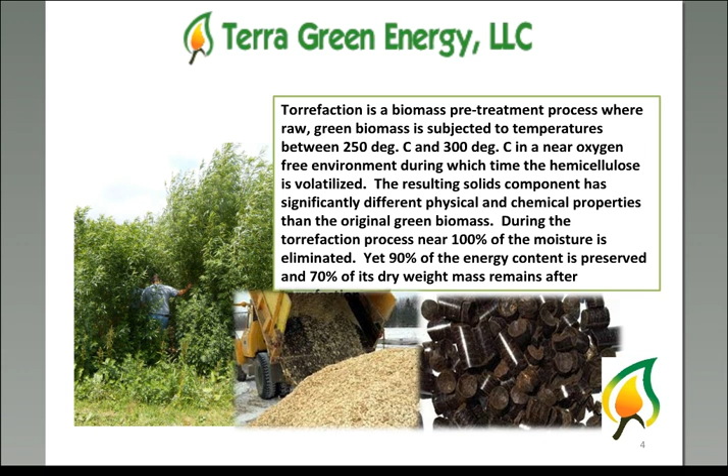I know that this table is a bit busy, but if we go through it, you can see the differences between the different forms of wood. If we look at wood chips, white wood pellets, torrefied pellets, I put a column in here for steam exploded pellets. For those of you who are not aware, a company called Zilkha has developed a pretreatment process based on steam explosion, and so I put that column in there. Charcoal and coal. I'm often asked the question, well, torrefied, that must be a lot like charcoal. Well, I think this table will explain to you where the similarities are and where the differences are.

If we look at moisture content across the board here, each one of these has slightly different moisture contents. The highest being wood chips, wood pellets 7 to 10%, torrefied pellets in the 1 to 3% range, steam exploded pellets about the same as torrefied, maybe a little bit lower, charcoal basically in the same range, and coal. Coal has a moisture content that can really vary a lot, but 10 to 15% moisture is quite common.

The heat content, the calorific value, as measured in megajoules per kilogram: wood chips are 9 to 12, wood pellets about 1.5 times that. Torrefied pellets can be twice the calorific value of wood chips, and 1.3 to 1.5 times what white wood pellets are. Steam exploded pellets, just a little bit less than that. Charcoal, of course, quite a bit higher. So this is one area where charcoal is different than torrefied, and of course coal.

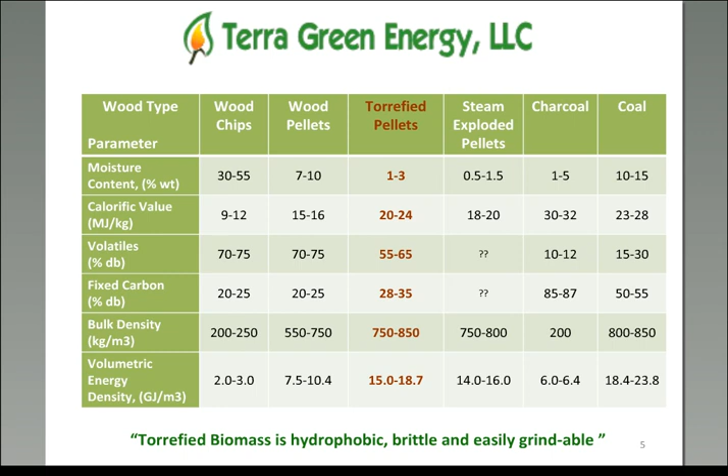And coal is, you will notice that torrefied pellets, steam exploded pellets, and coal are all relatively in the same range. The big advantage for torrefied biomass is that it's hydrophobic, it's brittle, and it's easily grindable. Those are physical characteristics that differ from either wood chips or whitewood pellets.

If we just look at the issues inhibiting the use of wood chips without any pre-treatment other than sizing: wood chips are low in density and bulky. They're wet and highly wettable. They're very expensive to grind. You have trouble feeding them because of the non-uniformity in the particle size. They have low energy content on a weight basis, low energy density on a volume basis, and they're bioreactive, meaning that they will rot. Torrefaction solves all of these issues.

It has a much higher bulk density. It's dry and hydrophobic, easily grindable. Uniformity allows ease of feeding. High energy content on a weight basis, high energy density on a volume basis, and it is not bioreactive. Torrefaction can be applied to all types of wood and grasses and other types of biomass, resulting in a uniform commodity type fuel.

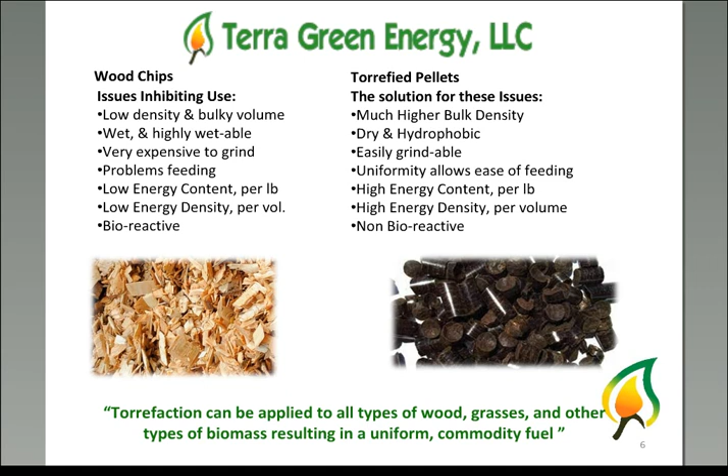Let's take just a minute and talk about what's going on in the rest of the United States with regard to torrefaction. About 6 months ago, there was a consortium formed to address in detail and in a quick time frame the issue of torrefaction. The founding members of this consortium of advanced wood to energy systems, it's called CAWES, are the United States Forest Service through their Forest Products Laboratory, the Herty Advanced Materials Development Center at Georgia Southern University, and the U.S. Endowment for Forestry and Communities.

These three groups are the founding members of CAWES, and CAWES will attempt to assess the challenges and knowledge gaps relevant to the advancement of torrefaction technology. They're going to put $4 million into this effort, and they're going to embark upon a 24-month work plan with an aim to validating torrefied wood as a promising renewable energy market solution. From their literature, you will see that torrefied wood has a significant market potential as a hydrophobic, densified energy carrier that stores, travels, and functions much like coal.

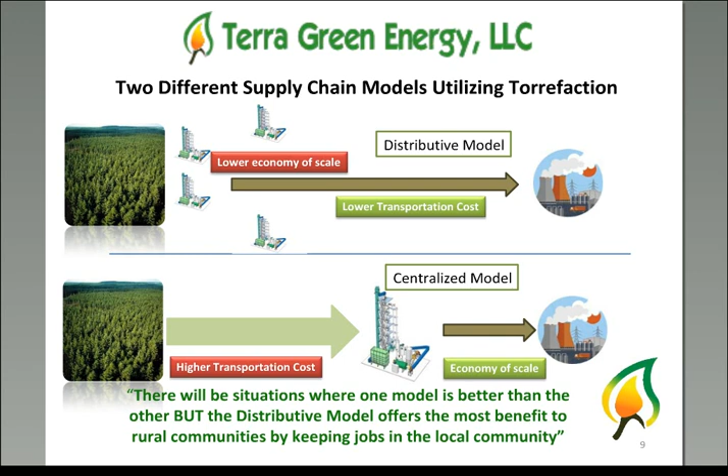The other model is the centralized model, where you remove the material from the forest and transport it as wood chips to a central, much larger torrefaction facility. Now, the disadvantage is the higher transportation costs, but you do enjoy some economies of scale because the facility is so much larger. There will be situations when one model is better than the other, but the distributive model offers the most benefit to rural communities by keeping jobs in the local community. I believe that to be the better model in the longer run.

In the fall of 2012, the managers at Terra Green Energy made the decision to build a small-scale commercial torrefaction process in Port Allegany, Pennsylvania. It's in McKean County. There were three reasons why this decision was made. First, of course, to demonstrate the technology. Second, to provide large-size samples for testing. And three, to utilize this demonstration facility as a marketing platform.

We can bring prospective customers for the technology and the product into the site, which we are happy to do, and show them a working torrefaction facility that a full commercial plant would look exactly like, and in fact, the algorithms and the computers that control it are all the same as on a full-size commercial plant. The system consists of three thermally integrated subsystems: a rotary drum dryer, a combustion unit, and our own proprietary reactor. The system includes all the necessary material conveyance systems: hot gas, ductwork, dampers, airlocks, fans, and a complete instrumentation package to measure and manage the process.

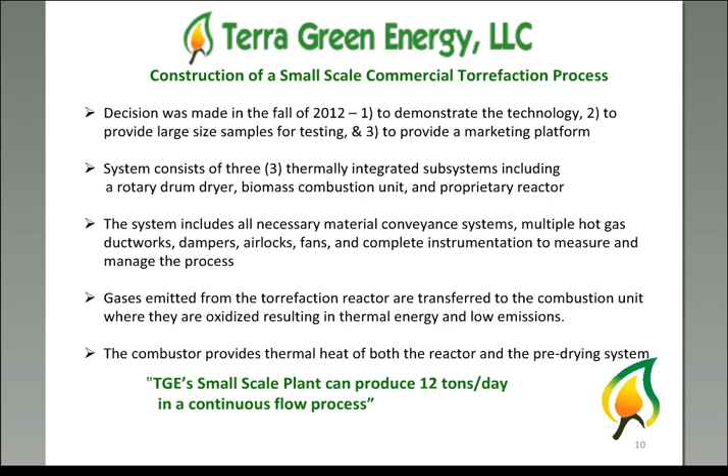So it goes into the rotary drum dryer. It is dried to about 12 to 15% moisture. It goes into the top of our torrefaction reactor. It travels down through the torrefaction reactor. We have the ability to control the residence time in the reactor from as little as 12 minutes to as much as 45 minutes if we so desire. The material goes down through the torrefaction reactor, exits the bottom, goes through a quench unit and a screw conveyor cooler, and exits toward densification.

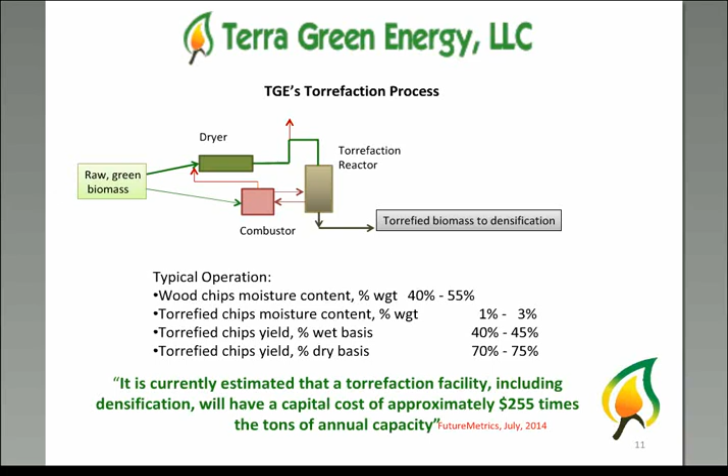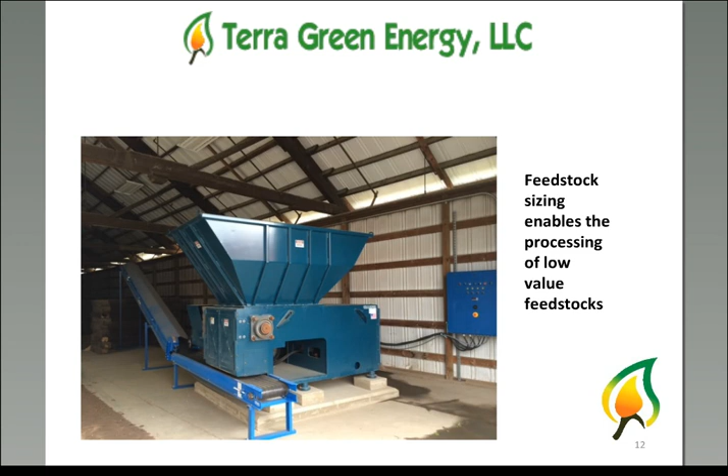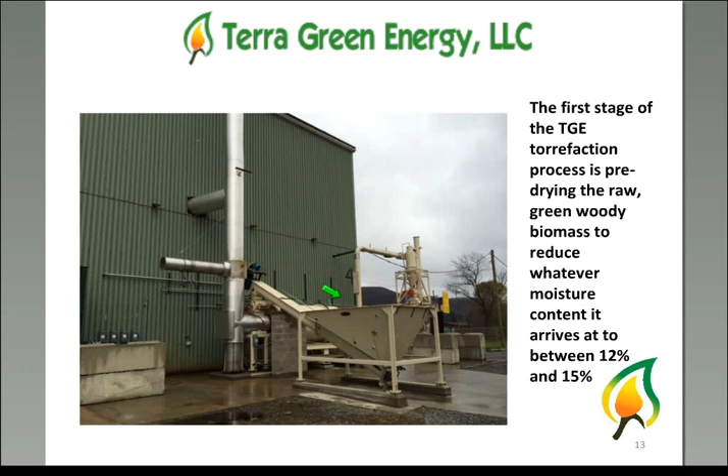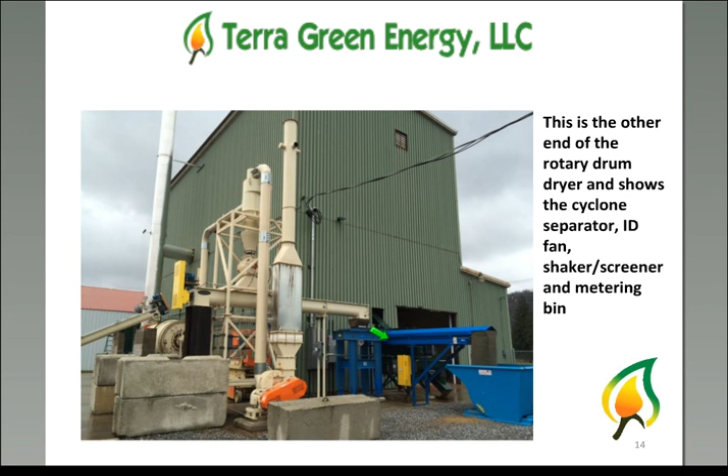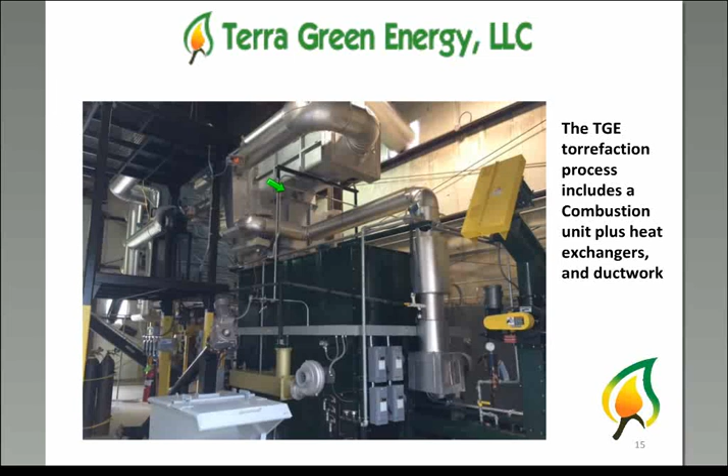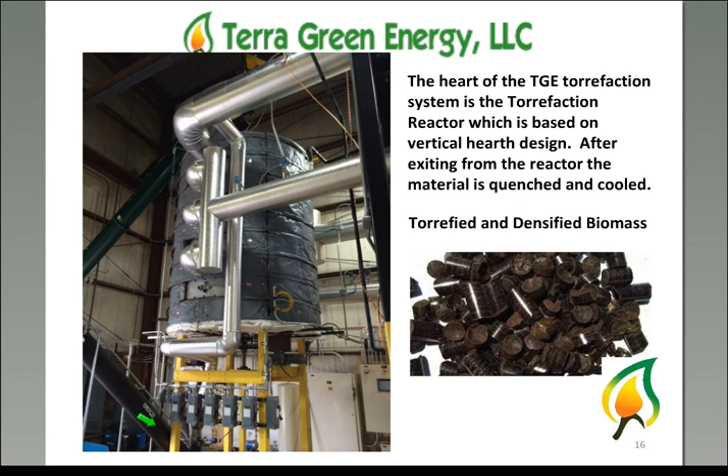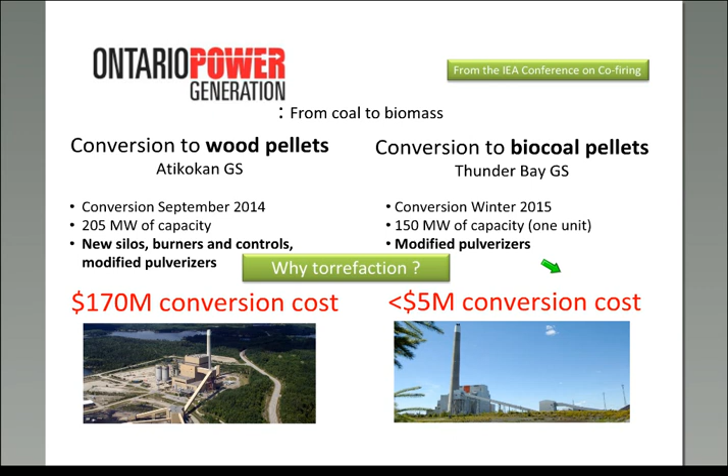Now, these biocoal pellets are steam exploded pellets. They went in that direction because biocoal pellets were available at this time. They could not get an adequate supply of torrefied pellets, so they went with the steam exploded pellets. That's, of course, one of the challenges.

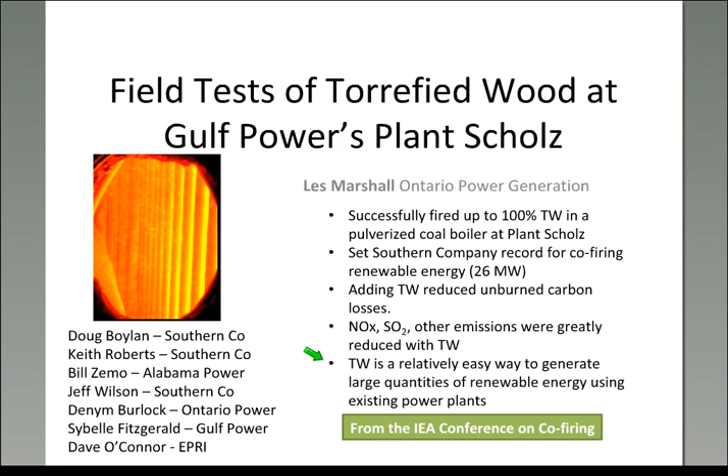Successfully fired up to 100% torrefied wood in the pulverized boiler. They set a Southern Company record for co-firing renewable energy. They found that adding torrefied wood reduced unburnt carbon losses. This is significant for them. And it also resulted in greatly reduced emissions of NOx, SOx, and other emissions. In summary, torrefied wood, they found, was a relatively easy way to generate large quantities of renewable energy using existing power plants. And again, this is from the IEA conference on co-firing.

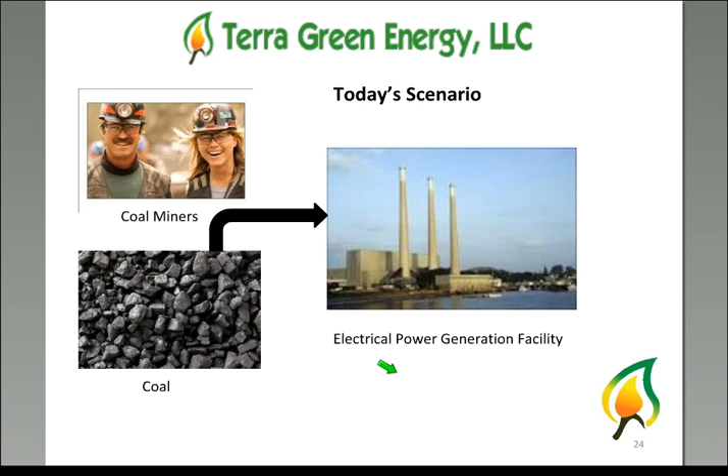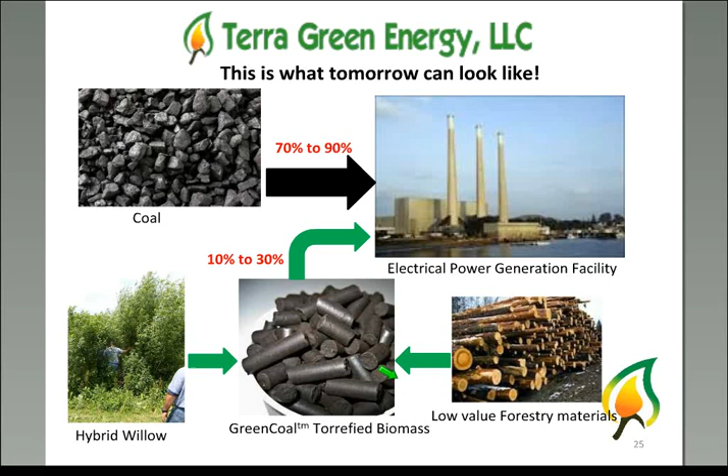How much does it cost to generate electrical power? I think we all are aware that installed hydro is the least expensive electricity that we generate here in the United States. A PC coal-fired plant greater than 35 years with new emission control, 600 megawatt, can generate electricity for between $36 and $37 per megawatt hour.

Now, these are not my numbers. These numbers come from a couple of sources, and they're listed at the bottom of the screen: a report for the Energy Information Administration in April of 2014, and also some information prepared for NREL by Black and Veatch back in February of 2012. So they looked at the entire spectrum of electrical generation sources, and they put them on this continuum. You will see natural gas combined cycle at just over $55.

Now, this is probably a little bit lower today because natural gas prices are a little lower, but because these new natural gas combined cycle plants cost, let's say, $500 million to $750 million a piece, and you have to pay for that, they're probably not that much lower. You can see where nuclear is, land-based wind, offshore wind, solar PV. Now these are all changing a little bit as the technology improves. They're getting less expensive, but this is where these reports place them on the continuum.

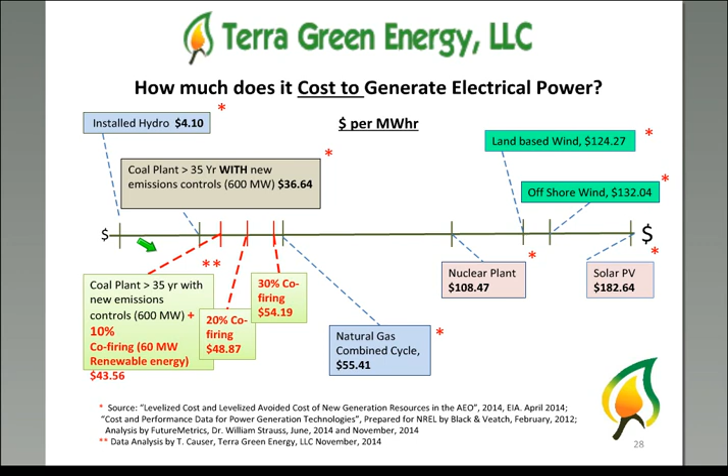So this is very important information where we know if you were firing at 30% co-firing, you would be generating 180 megawatts of capacity at this one plant. So using existing facilities to generate this renewable energy is important, and being able to mitigate some of the emission issues of these plants by co-firing is also very important.

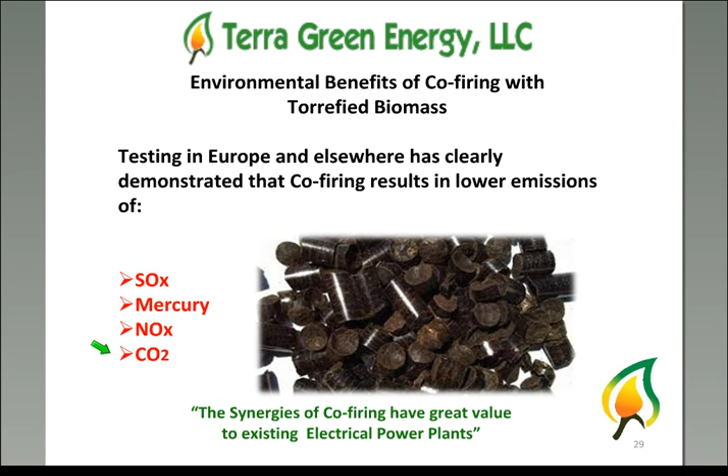Environmental benefits of co-firing: the testing in Europe and elsewhere, and there's more data supporting this literally on a week-by-week basis, shows that co-firing results in lower emissions of SOx, mercury, NOx, and of course CO2, because it's a renewable fuel. The synergies of co-firing have great value here with these plants.

Oftentimes, these last beneficiaries are somehow forgotten, but it's a benefit to many rural communities across our nation. It puts jobs back in the rural communities, and this is important. I live in northwestern Pennsylvania. I see our greatest export up here is our children, and that's very sad. I really want to work to bring jobs back to the rural community. As a former public official, I also know that it's important that local governments preserve and enhance the tax base. I see this as a way that can happen.